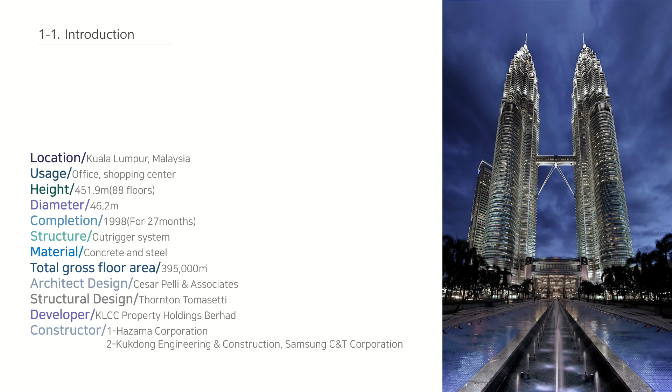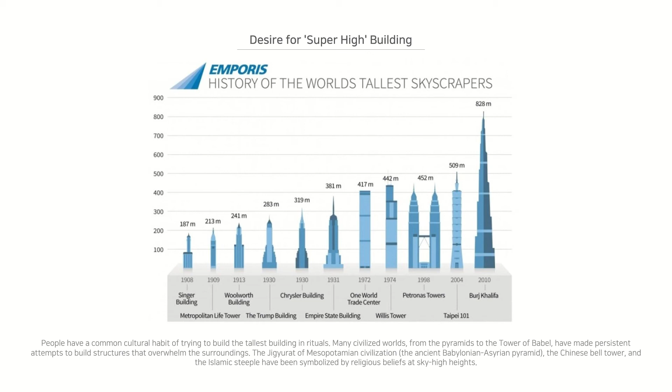People have a common cultural habit of trying to build the tallest building in rituals. Many civilized worlds, from the pyramids to the Tower of Babel, have made persistent attempts to build structures that overwhelm the surroundings. The ziggurat of Mesopotamian civilization, the Chinese bell tower, and the Islamic steeple have been symbolized by religious beliefs at sky-high heights. Today, many modern skyscrapers carry the same sense as ancient obelisks. Petronas Twin Tower in Malaysia is a typical example of this kind of tendency.

Now we are going to look at a brief business progress overview. Excavation work first began in April 1993 and took 1 year to complete. After the foundation completion, total construction took 2 years, and it officially became the tallest building in 1996.

To look into the specific details of construction history: in early 1981, the Malaysian government decided to move the Selangor Turf Club and its horse racing track from the heart of the city and to redevelop the site to meet the demands of urban and economic growth. The economic boom years of the late 1970s and 1980s made the area very attractive for developers and very congested with uncontrolled expansion.

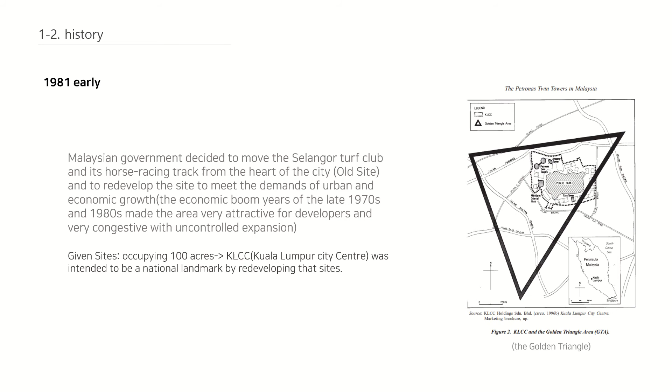The project became a principal part of the Wawasan 2020 plan by the fourth Prime Minister of Malaysia, as part of his government plan for Malaysian progress. Following approval of the development by the government, an international competition was organized in 1990 to select a master plan, which is an integrated mixed-use development for working, living, shopping, visiting, and enjoying for the new KLCC.

The new master plan for KLCC included office buildings, retail centers, hotels, residential buildings, museum, art center, and parks for 37 acres, and 63 acres were developed as public areas including a 50-acre public park.

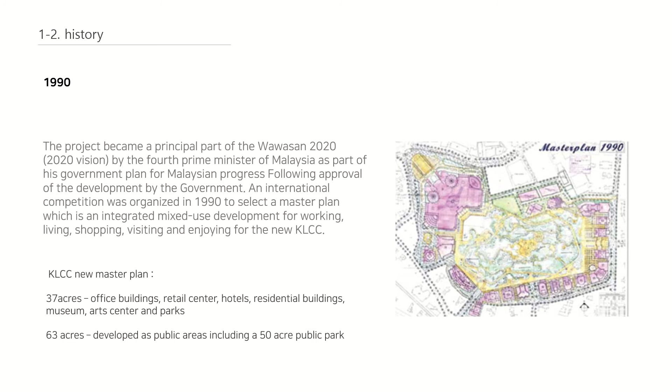In August 1991, the design was selected, presented by 8 firms invited to participate in an international competition, and the winner was Cesar Pelli, the Argentine architect. The bidding process went along two nations, Korea and Japan.

They expected competitive construction to reduce construction times and provide incentives to companies that completed first, using rivalry between Korea and Japan. There was a bidding issue with Samsung C&T because they had no experience constructing a fiftieth floor or higher building.

In January 1992, the project planning commenced, and an initial project management team, KLCCB, was established. They set a budget and a computerized cost management system.

Excavation first started in April 1993. Samsung was assigned to lead the construction of the first tower, and Hazama Japan Corporation was assigned to lead the second tower. Japan started building the second tower 1 month earlier than Samsung.

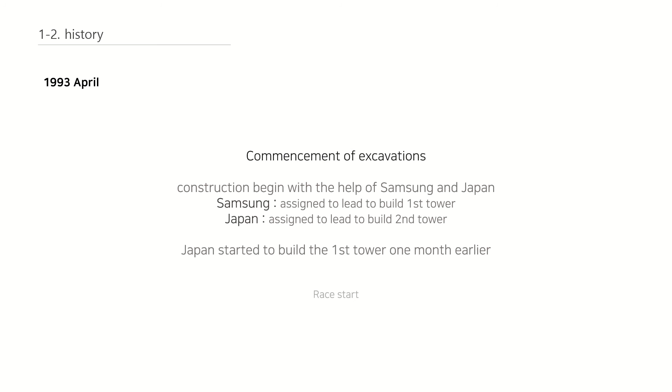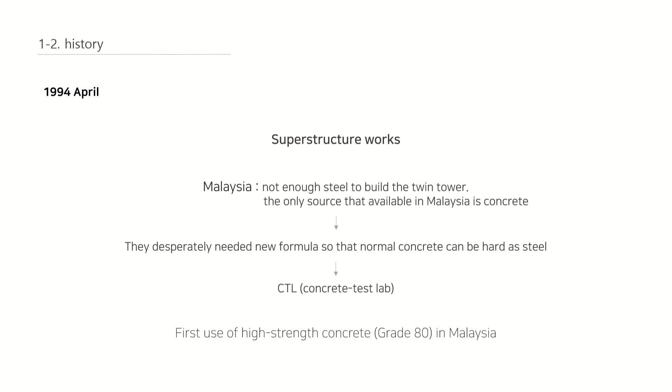In August 1993, foundation works reached 150 meters below ground level. There were some problems in superstructure works because in Malaysia there was not enough steel to build the twin towers. The only source available in Malaysia was concrete. They desperately needed a new formula so that normal concrete could be as hard as steel.

So they made progress in the concrete test lab and made high-strength concrete, and it was the first use of high-strength concrete in Malaysia.

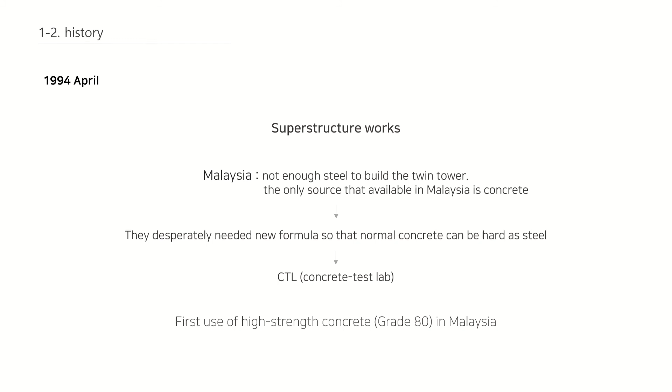In 1995, they decided an elevator must be installed in the twin tower so that people could access the floor in 70 seconds. They decided to put elevators on the upper and lower deck, to minimize the time taken for an elevator to travel throughout the tower.

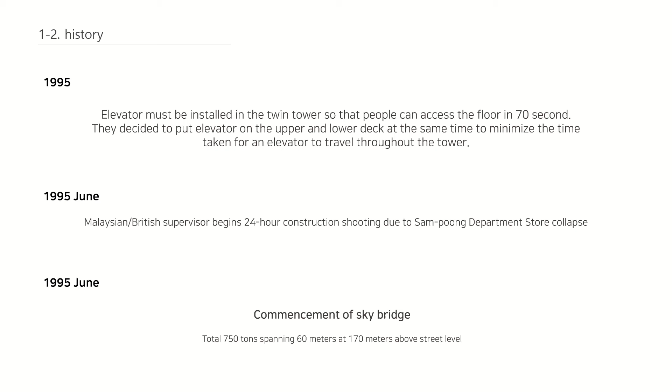In June, the skybridge, total 750 tons, spanning 60 meters at 170 meters above street level, was commenced. Though Japan started construction 35 days earlier, Samsung C&T poured all concrete at the top floor 2 hours and 16 minutes earlier than Japan. Jacking up of the pinnacles occurred in January 1996.

The second tower, built by Japan, was not straight — it bent 25 millimeters. They tried to fix this problem by bending the next 16th floor to make the tower go straight again.

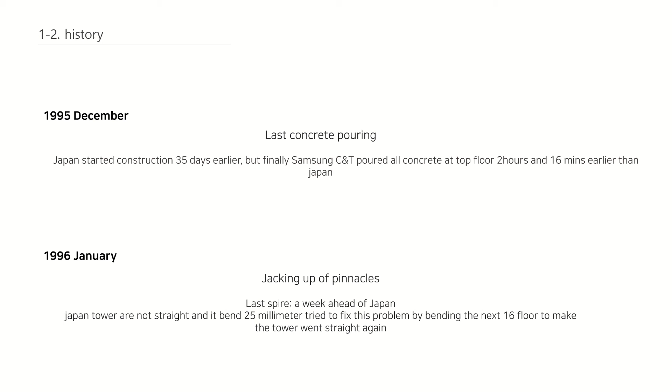In 1996, the towers were certified the world's tallest buildings by the Council on Tall Buildings and Urban Habitat. Finally, the opening celebration ceremony was held in 1999.

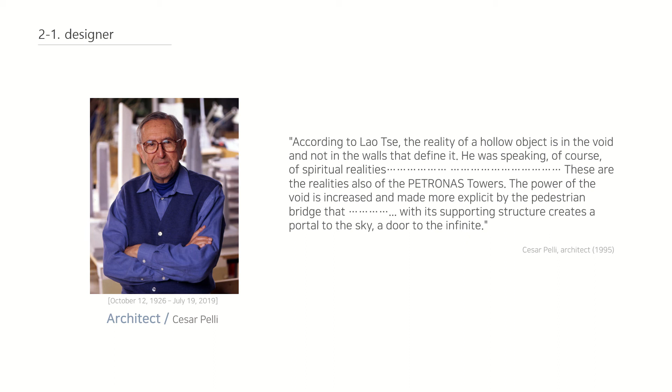Now we are going to get to know about the design of the building. First, Petronas Twin Tower is mainly designed by Cesar Pelli, an Argentine architect. He said that the power of the void is increased and made more explicit by the pedestrian bridge, and its supporting structure creates a portal to the sky, a door to the infinite.

Then let's look at the design development. In order to escape the meaning of the existing skyscrapers in the United States and Europe, the connection between Petronas Tower, Kuala Lumpur, and Malaysia required inventory of the characteristics of traditional skyscrapers. Buildings are linked to individual areas in various ways. The shape of the Petronas Tower has its origins in the Islamic tradition of giving greater symbolic importance to geometric patterns than Western culture.

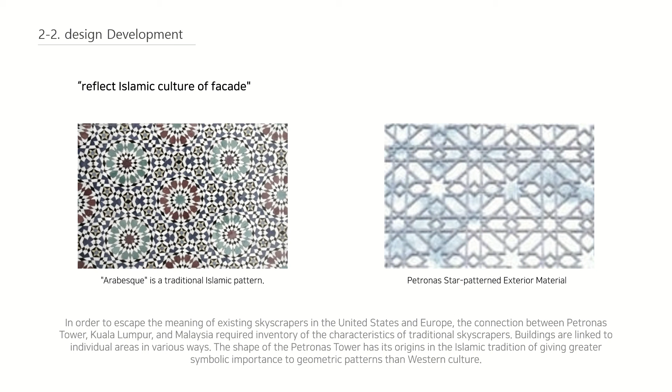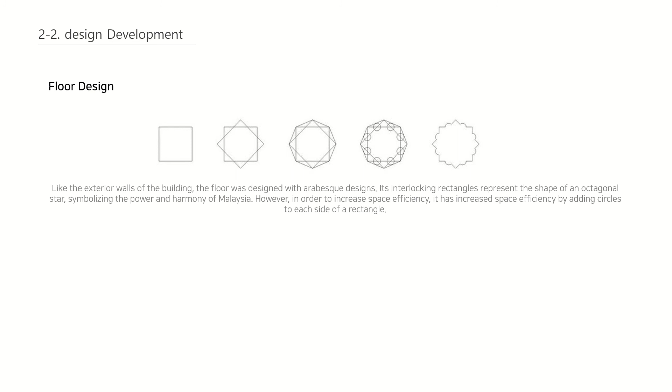Like the exterior walls of the buildings, the floor was designed with an arabesque design. Its interlocking rectangles represent the shape of an octagonal star, symbolizing the power and harmony of Malaysia. However, in order to increase space efficiency, it has increased space efficiency by adding circles to each side of the rectangle. It is based on simple Islamic geometric forms of two interlocking squares, creating a shape of an 8 pointed star.

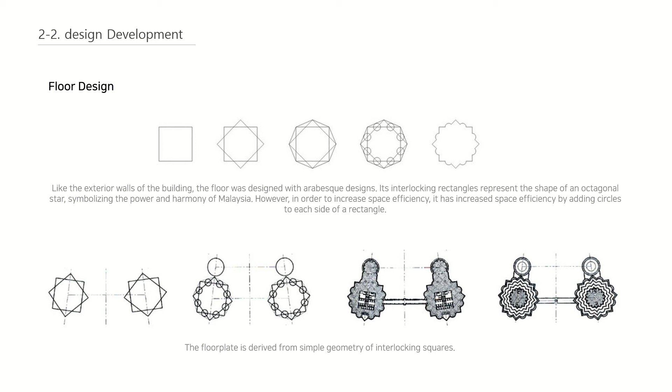Upon the 8 pointed star are 8 superimposed semicircles, softening the inner angles. These semicircles are themselves anchored by the arcs of the main structural columns of the buildings. The semicircles were superimposed in the inner angles of the interlocked squares to create more usable floor space.

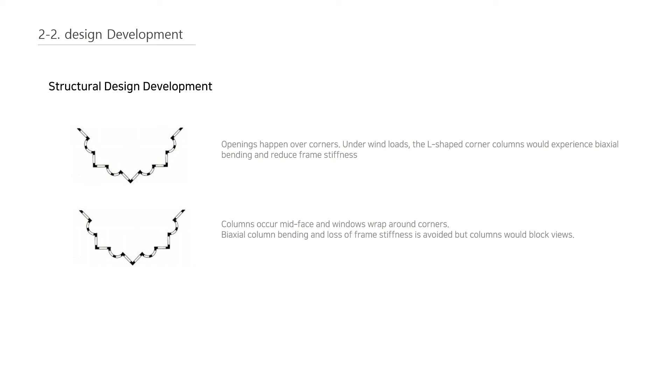For the structural design development, columns, corners, and views became important sources. Openings happen over corners. Under wind loads, the L-shaped corner columns would experience biaxial bending and reduce frame stiffness. Columns occur mid-face and windows wrap around corners. Biaxial column bending and loss of frame stiffness is avoided, but columns would block views.

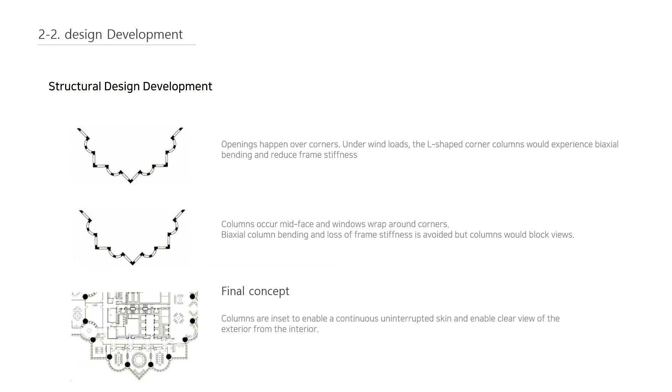So, at the final concept, columns are inset to enable a continuous, uninterrupted skin and enable clear view of the exterior from the interior.

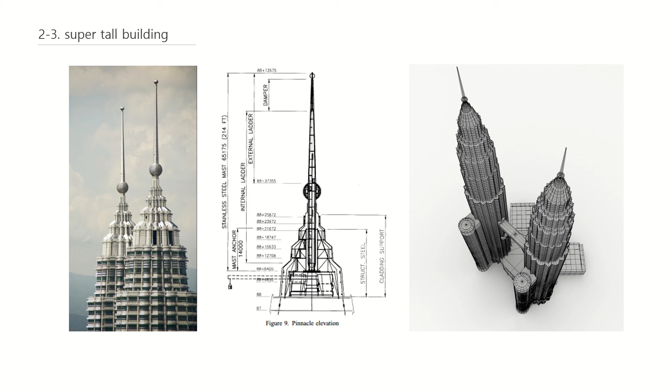Now I'm going to present about the construction details of Petronas Twin Tower. First is about the foundation. Before entering the design of the 88-story tower, 440 boring tests were conducted to determine the ground conditions. As a result, due to the steep slope of the rock, the tower's location is moved 60 meters southeast, and it is constructed on a canyon-shaped underlying rock floor with a depth of 80 to 180 meters from the ground.

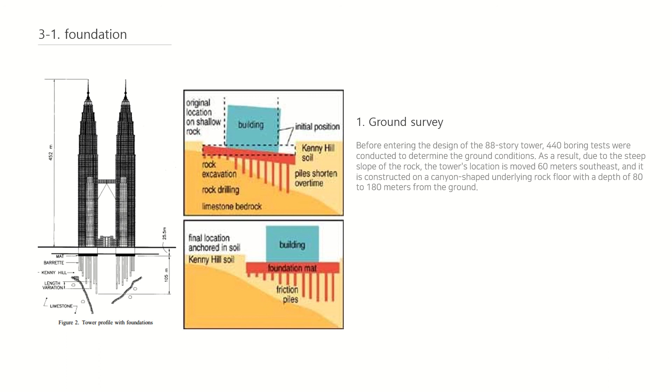It has excavated 104 rectangular friction piles, sized 1.2 meters by 2.8 meters in length, from the base floor slab to between 40 and 150 meters.

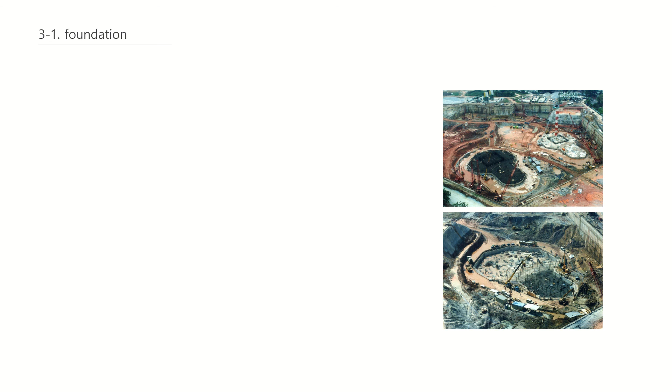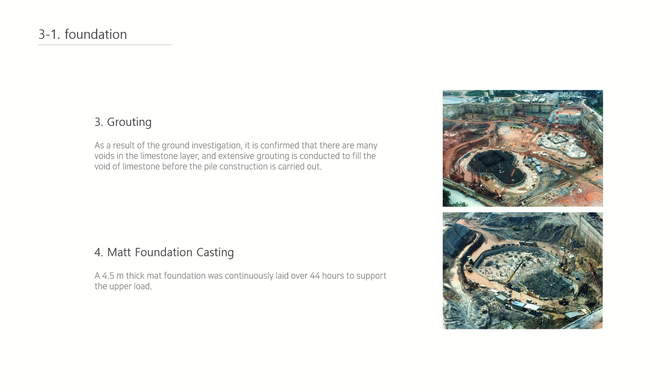As a result of the ground investigation, it is confirmed that there are many voids in the limestone layer, and extensive grouting is conducted to fill the voids of limestone before the pile construction is carried out. A 4.5-meter thick mat foundation was continuously laid over 44 hours to support the upper load.

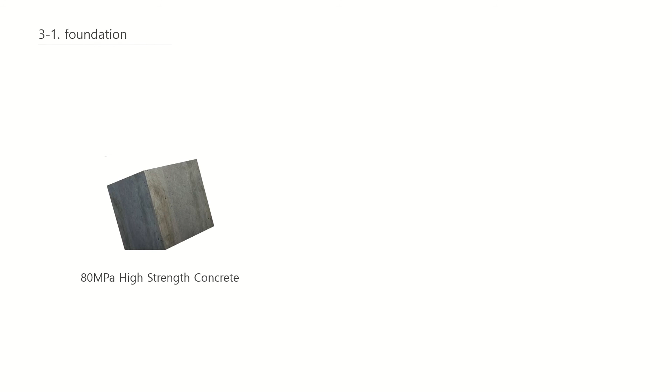They used high-strength concrete up to 80 megapascals in core wall, columns, and beams. For that kind of concrete, which has 80 megapascal strength, the size of a dice can hold the weight of 12 adult men.

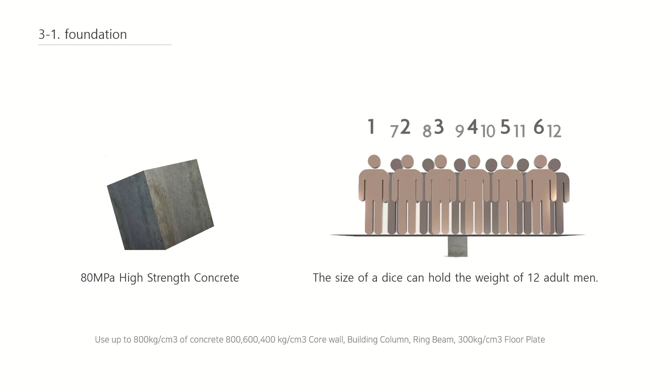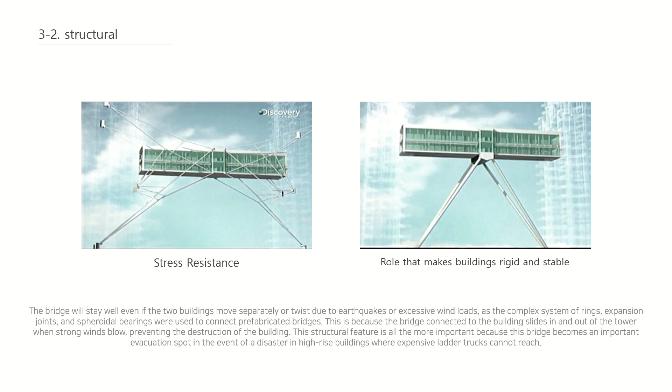Following structure feature is the sky bridge. The bridge will stay well even if the two buildings move separately or twist due to earthquakes or excessive wind loads, as the complex system of rings, expansion joints, and spheroidal bearings were used to connect prefabricated bridges. This is because the bridge connected to the building slides in and out of the tower when strong winds blow, preventing the destruction of the building.

This structural feature is all the more important because this bridge becomes an important evacuation spot in the event of a disaster in a high-rise building where expensive ladder trucks cannot reach.

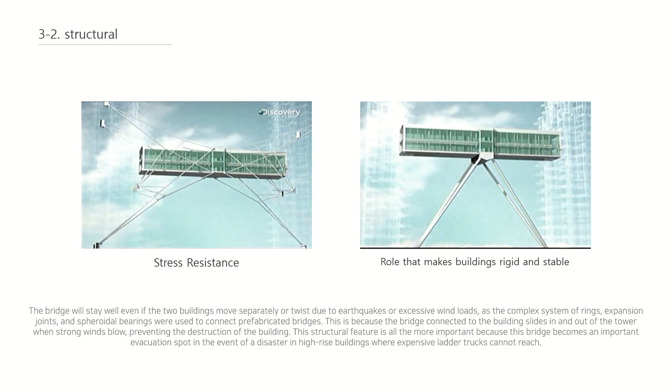There are some technical features beyond that. The Petronas towers respond remarkably well to the tropical climate of Kuala Lumpur using several techniques. The glass curtain walls have stainless steel sunshades to diffuse the intense equatorial light. These tropical walls make a positive contribution in two ways. They minimize the heat and glare entering the building, but at the same time, they reflect the play of light and shadow, expressing the tropical environment.

For the last detail, new concrete transfer technology was used, connecting pipes up to 380 meters high, excluding steel structures at the top of the tower without a crane. The self-climbing formwork method, as well as pumps to send concrete up to the top floors through steel pipes from the ground below, meant that new floors could be added more quickly.

Consequently, the entire construction process took only 3 years. And high performance concrete was first used in Malaysian construction.

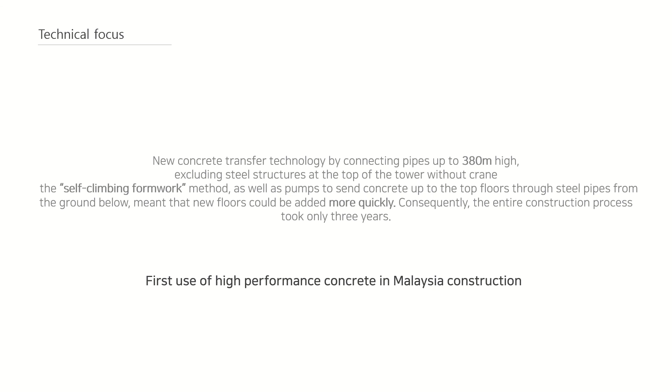By this time, we tried to know basic information widely about Petronas Twin Towers. We figured out many structural and technical figures and look forward to making deeper research next week. Thank you for listening.